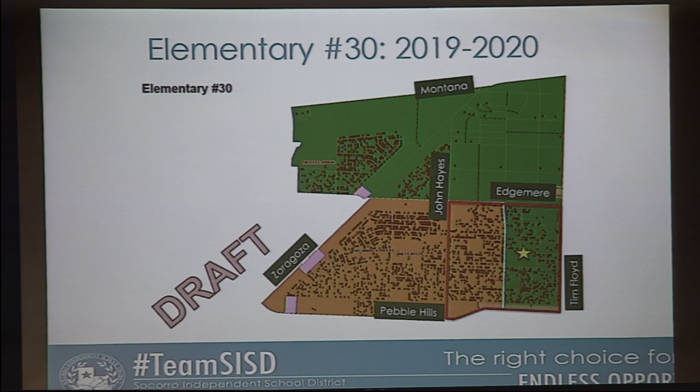The first recommended boundary change will be for elementary number 30. The recommendation is to provide support for Butler Elementary. Butler Elementary right now has about 350 overflow students.

What we are recommending is the area in orange currently is the Butler feeder pattern's attendance zone. The area in green is the current Chester Jordan attendance zone. Elementary number 30 will actually help both of those campuses, and it will incorporate everything east of John Hayes, north of Pebble Hills, west of Tim Floyd, and south of Edgemere.

Pre-K number 30, thank you to our architects, does have a pre-K hub with 10 classrooms designated for pre-K. It is a 898 projected start. Out of that projected start, we have 192 pre-K students projected to open up elementary number 30.

We are going to do a soft open for the pre-K hub at number 30, serving Butler Elementary and elementary number 30, just like we did with Carrasco this year. Carrasco Elementary is the pre-K hub for Lujan Chavez and Carrasco. We would like to do the same thing for the first year of elementary number 30 opening.

These are the numbers off to the right as far as the number of students that we would be transferring, and they would be the first students to open up elementary number 30 with our new principal, Ms. Thomas. With your approval, we will start going out to community meetings.

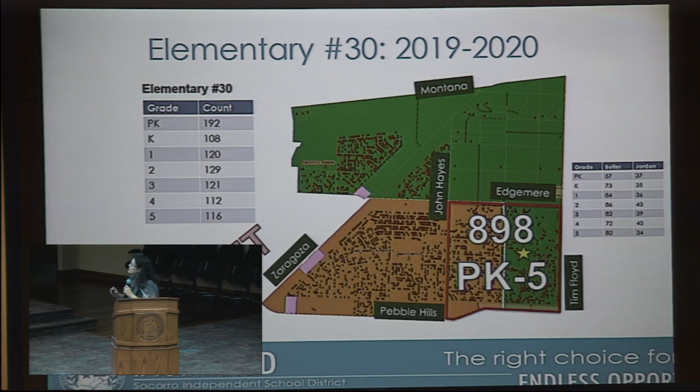We'll first have faculty and staff meetings with both Butler and Chester Jordan to share the proposal. Then we'll have a number of community meetings with parents to get feedback. After receiving feedback, I will recommend another board workshop to present the feedback we've received, and the possibility of presenting the recommendation for approval at the November board meeting. So this is for elementary number 30 proposed boundaries.

As you noticed for Butler, this is their current attendance boundary. What we are doing is removing that little peninsula to the east. Let me get the actual enrollment as of yesterday. Currently Butler is at 1,009 students.

With this boundary recommendation, we would now have 895 kinder through 5th grade students. Within time, any of the portables that we have would now transition to any other area of need, and we would bring the students into the campus. Those are our new counts if this boundary is approved in November, and that is what our grade levels would look like.

Any questions for boundary recommendations for elementary 30?

Yes, sir. Ms. Macias, I'd just be interested in seeing the same information for Chester Jordan as you gave us for Butler—the anticipated counts for number 30, the numbers transferring from each of the schools, and the result of students anticipated to be enrolled. But we don't have it for Chester Jordan. I'm moving forward for Chester Jordan now. Let's see. Yes.

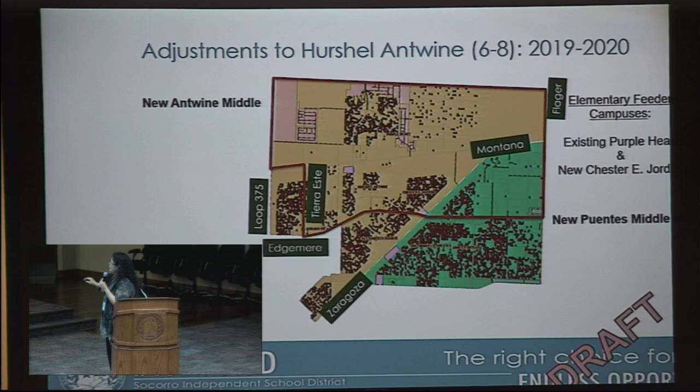What that would do is now we would have 2 elementary campuses, Chester Jordan and Purple Heart, that would feed into Hurshel Antwine. And right below Edgemere, we would actually have 2 elementary campuses feeding into Rafael Hernandez.

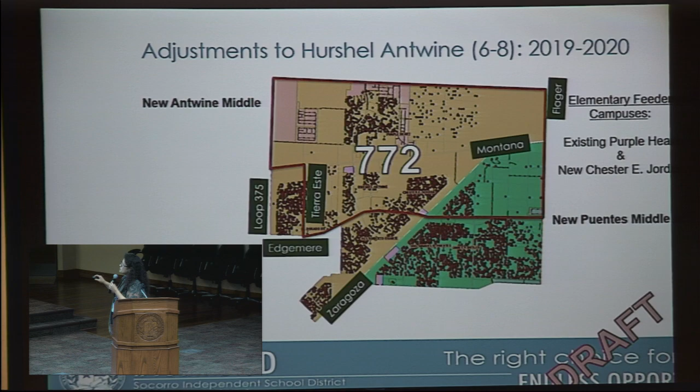With this proposal, we would have Hurshel Antwine at 772, 6th through 8th grade students. And the transition would be our students currently at Hernandez. Everything in yellow is the current Rafael Hernandez boundary.

And currently in Puentes, this is the area in light green or light blue. This area here already goes to Chester Jordan for elementary. So our recommendation is that they continue with their cohort right over to Hurshel Antwine for middle school, instead of splitting the cohort with some going to Puentes and some going to Hurshel Antwine. And for high school, they would continue with their cohort to El Dorado High School, and that now solidifies the boundaries for El Dorado High School.

What that would do is now we have available space for our students. Again, all this area here is the undeveloped area where we have single-family homes coming in the future. So that would give us available space to house them in a middle school.

For Puentes, this is one of our fastest growing middle schools. It also allows us available space for the growth that is projected in the Pebble Hills feeder pattern. So therefore, our new Puentes, 6th, 7th, and 8th, now we have available space. Currently, Puentes is at 1,100 students. It's a little bit over.

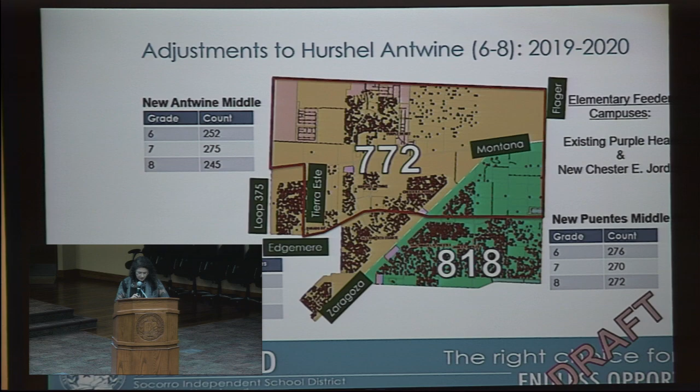The recommendation of Hurshel Antwine. Ms. Macias, let me make sure I'm following. You're suggesting that we change Hurshel Antwine from an elementary school to a middle school? Correct. Okay, all right, I got you.

Along with that recommendation is the second piece, which is Paso del Norte is currently a K-8. Our recommendation for Paso del Norte would be for it to be an elementary campus. That way, everything below Edgemere, we have two elementary campuses, Paso del Norte and Duarte, that will feed into Hernandez. And everything above Edgemere, we have two elementary campuses, Purple Heart and Chester Jordan, that will feed into Hurshel Antwine.

What about the appropriateness of the facility itself? I've been into some elementary schools like Horizon Heights, and I can't imagine that ever being a middle school. Not that we would, but Hurshel Antwine - it was built as a K-8.

Oh, it was? Ms. Macias and I have walked both facilities. There are some issues with the lower levels because both of them are K-8s. At Antwine, the kindergartners and pre-K have smaller restrooms inside the room and stuff, but that can be addressed. It was built as a pre-K-8, so there are athletic facilities and stuff for the 6th, 7th, and 8th graders.

Ms. Nájera, Mr. Eby, can we get a better map in a packet? I can't make heads or tails out of this. What's going to happen here is, one of my concerns is we're going to bounce students back and forth, and we know that's detrimental. What I'm hearing is a lot of numbers about where we're moving, and I don't mean to be rude, but we're not in the process of packing tacos. We're really talking about students here and where are we going to put them. Can I get better - I can't make heads or tails of this.

I mean, they're colorful, it's the geocoding maps, but I can't make heads or tails. I apologize, but I can't see anything. Could we get a handout later, maybe in the Friday packet or something? Yes, sir. And then also a comparison of where we're moving students, because we just did boundary movements, and if we're going to move a student over and now we're going to move them back, I'm not supportive of that at all.

This has been part of the plan. None of these students have been touched before. This is part of the phase-in to maximize the use of our facilities. This is the first time we touched this El Dorado feeder pattern, and we did that with the best intent to ensure we're maximizing the use of our facilities versus building a new building and now having available space. As we built number 30 and 29, it gives us capacity. For example, Duarte would help support Lujan Chavez with the overflow, and Chester Jordan would help Butler. With our new elementaries in those feeder patterns, it now solidifies the El Dorado feeder pattern and the buildings we have available to meet the needs of all our students.

One more question, Mr. Nahid. Mr. Arrington, so with Hurshel Antwine, since it was built for K through 8, are we going to have the athletic facilities as well? Yeah, it's got a full gym, locker rooms, a weight room, softball, baseball, track. And we built them at Paso del Norte, and we don't need them now - it took us so long too, took a long time to get those there. Okay.

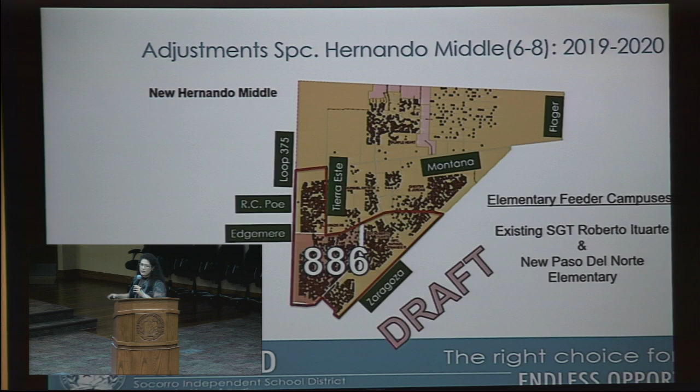In this area, we are already consistently—if you notice, there is no little pink area, so this is the true boundary for a middle school. So it would be at 886 students, 6th through 8th grade.

And for Roberto Ituarte, again, maximizing the use of all of our facilities. For Ituarte, it currently has available space, so Ituarte would now be, and it is centralized, our pre-K hub for the El Dorado feeder pattern. And with that, it would be comparable to O'Shea and Myrtle Cooper.

With that, we would have our 348, give or take, pre-K students in our hub, and Ituarte would be at 917 students. That is the normal capacity that Ituarte has had. This year, with the opening of Rafael Carrasco, Ituarte's current enrollment is 731. However, their enrollment was very close to 1,000 before, so this is what they are used to as far as for our students. So this would give them a pre-K hub and then the comparable numbers for each of the grade levels.

Ms. Macias? Yes. I'm sorry, are we currently using portables at Ituarte? At Ituarte, they are currently not using the portables. What we have them using the portables is over at Rafael Hernandez for our middle school.

Thank you. Did you have a question, Mr. Eve? Yeah. So our schools are up here. Can we do this with somebody else so that it's not such an oval pattern as usual? I mean, I don't like that every time we got the schools at one end of the feeder pattern, and we found numbers to fill a school, so we go down here. Down here, there's nothing else we can do and adjust so that the school is more centered within the feeder pattern, so it is a neighborhood school?

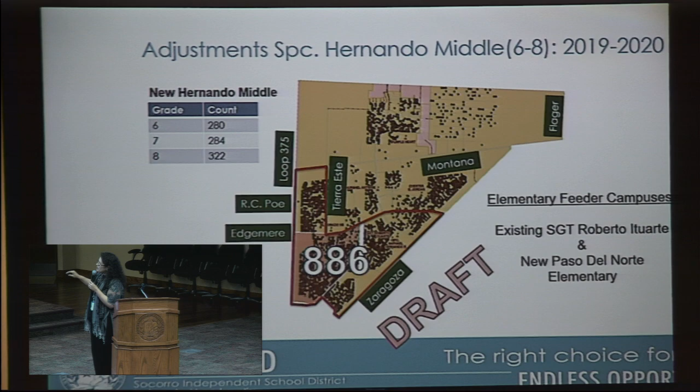For Hurshel Antwine, for the first year, 2019-2020, we would be transitioning to the middle school. So kinder through 3rd would transition right next door to Chester Jordan. The area right over here, and I'll go back, that's the little peninsula here. Kinder through 3rd would transition to PDN.

With that transition, Hurshel Antwine for the year 2019-2020 would be 4th, 5th, and 6th grade. Those 5th graders would be transitioning to that middle school 6th grade section. For 2019-2020, the little ones at Purple Heart and Chester Jordan 5th grade that used to transition to Rafael Hernandez would transition right next door to Hurshel Antwine. So that way, now our 6th grade is becoming set for our new middle school as it transitions over. So for 2019-2020, we would have 360 students at Hurshel Antwine.

What that would do is give available time to maintenance and operations so they could do any adjustments needed for that campus as it transitions to middle school. As we go through the years, it's a 2-year transition for PDN, a 3-year transition for Hurshel Antwine, so that all of the facilities are in place as the students transition in.

For Chester Jordan, it stays the same, it's a K5, but they are now adding students: 3rd grade the first year, 4th grade the next year, and 5th grade the following year. That way they're transitioning over for Chester Jordan. These are the students as far as Antwine, kinder through 3rd, kinder through 4th, kinder through 5th, and these are the numbers as they transition in the 3 years as we go through.

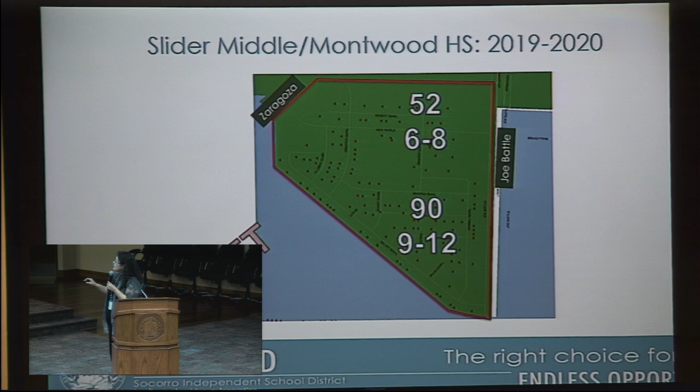One of the last proposals is this area here, we call it the Quails area. I think it was addressed about 10 years ago. This Quails area, currently, our students go to Slider and Montwood High School. There's 52 6th through 8th grade students, and there's 90 9th through 12th grade students. These students technically fall right into the America's feeder pattern. But a decision was made, they supported Montwood for the past 10 years. Before they were at America's and they were transitioned to Montwood 10 years ago.

Our recommendation - which ones again? This little area right here, it's called the Quails, we call it the Quails area. Right behind the Walmart. It's not on... oh, it's not on the - where again? Yeah, because I click on it - bottom, down there, at the bottom, this little dangly part, this little area, it's the area here.

Right behind Walmart. So the recommendation would be that they would transition to the America's feeder pattern, again, when it's a natural transition: 5th to 6th, pre-K to kinder, or 8th to 9th grade.

So half of Slider would go to Montwood, half of Slider would go to Americas? No, it's a small portion. There's currently 90 9th through 12th grade students, so these are our numbers here. At Slider, we currently have about 52 students. So where would they go to middle school? They would go to Clark, and then they would go to Americas.

The problem with Montwood is it's landlocked, on the west side of our district. And anything we pull away from that will end up at capacity tomorrow. So why would we want to do that?

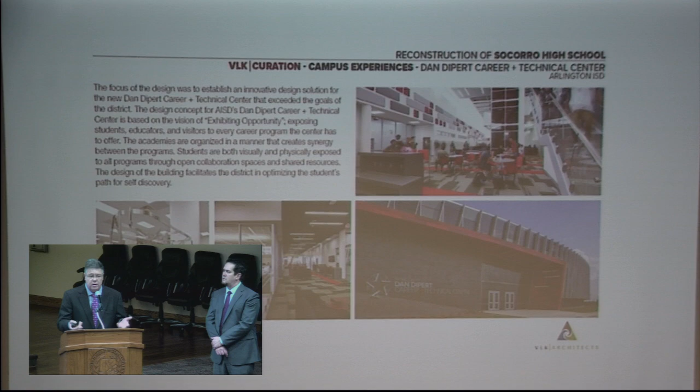We then went to the Dan Dipert Career and Technical Center at Arlington ISD. It's a campus-wide facility, designed to exhibit opportunity. You go through a Main Street area with glass that looks into all the different academies, which are positioned so their academic programs can feed off one another and do projects together. That was one of the things we brought back and incorporated into the new Socorro High School design.

This is Energy Institute High School, which opened this year at Houston ISD - a high school for students focusing on energy careers. The main thing we saw here was how collaboration spaces working off the labs and classrooms, with whiteboards, marker surfaces, and projection, allowed students to work not only in the classroom but also out in collaboration areas.

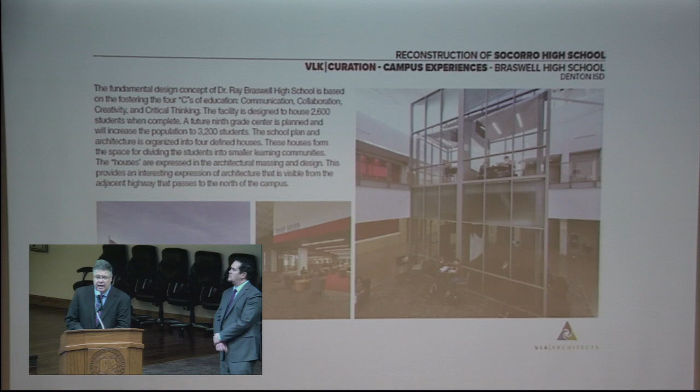The Braswell High School is the newest high school at Denton ISD. Again, what was seen here was lots of collaboration areas where students can work with themselves and with faculty members in small and large group instruction, to really work in settings more like what they'll experience in college and in the working environment.

And then Keller High School. This is Keller ISD, northeast of Fort Worth. And the reason for touring this campus, this is a very old campus.

Like Socorro High School, it was the first campus at Keller ISD. It had gone through many renovations and additions in the past, such that you couldn't even find the front of the building. There were areas back in the building that they were still using for various functions, but they no longer supported those functions with the size of the programs, like the band hall. So they wanted to go there, see how this building had been renovated successfully into a new campus that represents the Keller attendance zone.

And then Alvin High School, Shadow Creek High School, Alvin ISD, down south of the Houston area. This is a new building that mainly is set up for flexibility and transparency - the ability to move students around, to move walls, to different program types, a very adaptable surface for academics as it proceeds through the years. Plus it's a very compact plan and it has 3-story academic towers.

So what came out of this was honoring the tradition of Socorro High School - such things as juice bars, being able to plug in devices, learning centers for tutorial areas, and really a maker campus. Not a maker space, but a maker campus where you can do education everywhere through the district.

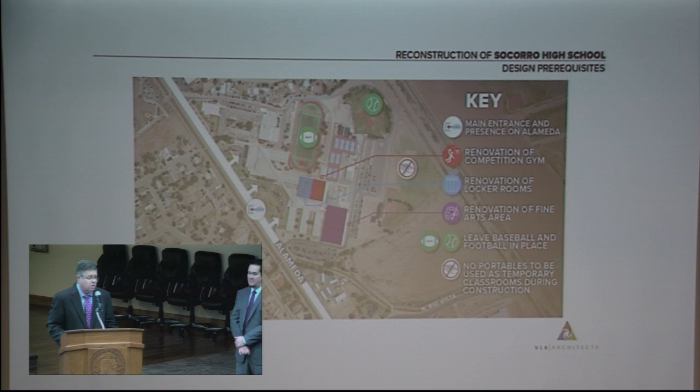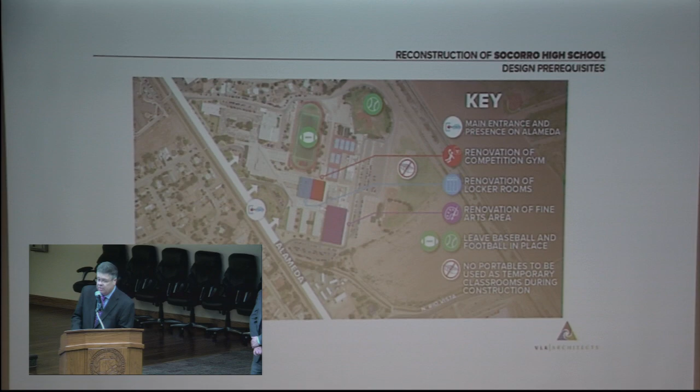And then one of the things that came out of the charrette is how the neighborhood and the community wanted to make sure that the front of the building was oriented and visible off of Alameda Road.

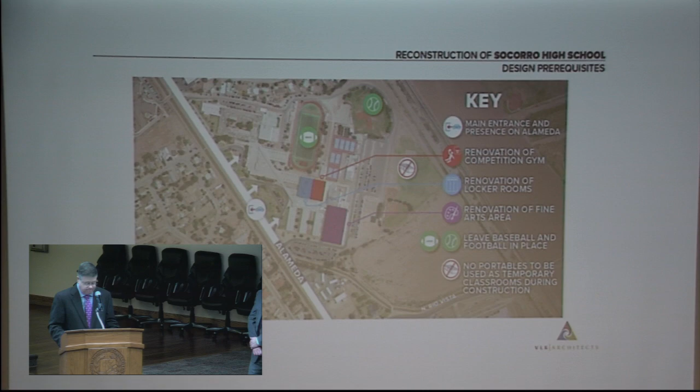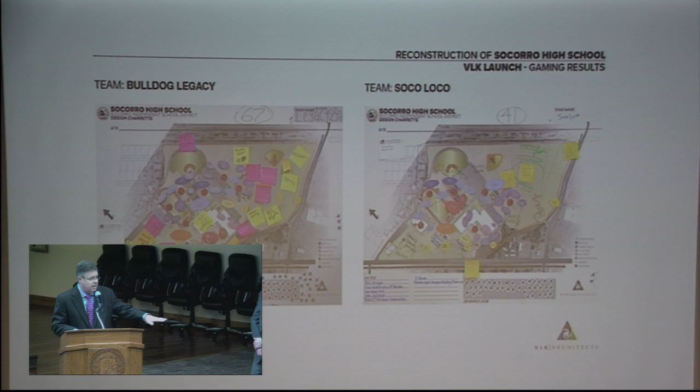This is examples of some of the gaming concept boards that the teams worked on, moving the puzzle pieces around and getting the things acclimated. We let them move things around to see where they wanted academics, where they wanted the administration area, those type of elements, where they wanted athletics. We then came back with this concept here, which they selected, that was turned into the design by that committee.

And so the entrance is here off of Alameda, along this face of the building. There is CTE programs here, fine arts here, athletics, cafeteria with the library here, career and technology, and then academics here.

Because one of the things that was talked about is really embedding CTE and the core academics, and Socorro Early College and the Health Professions Academy together, to really let those programs share, do projects together, and support one another.

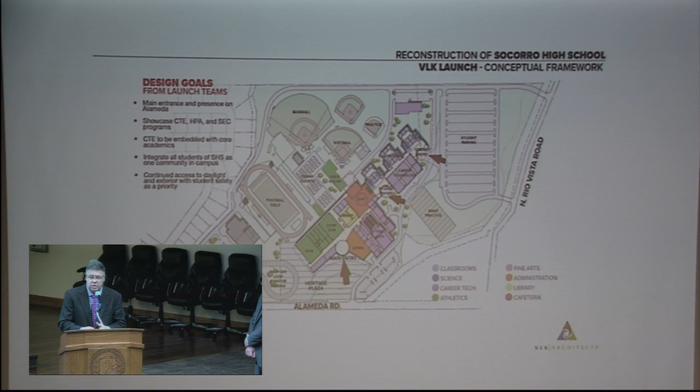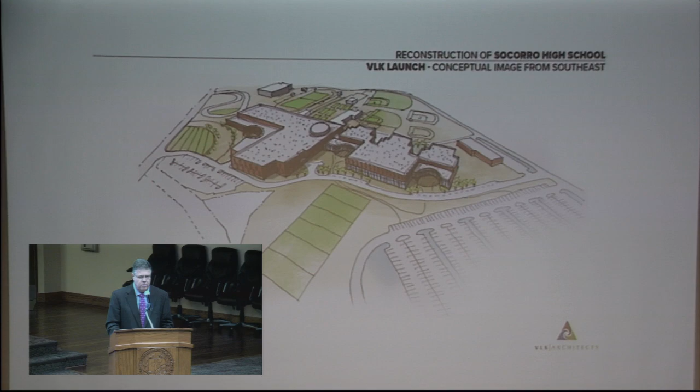And also what came out of this was really a discussion by the parents, the teachers, and the students - how they wanted this building to really show them and lead them to what their future possibilities are of working and living in the Socorro community and beyond, and to give them aspirations and to show them all the possibilities through education and how they can benefit from that.

We had typology of space boards. These are boards where we have the exterior of the building, classrooms, library, cafeterias, athletics, and they put stickers on here, and they also put Post-it notes and put comments, and these are the highest ranked ones that we've received from the VLK Launch.

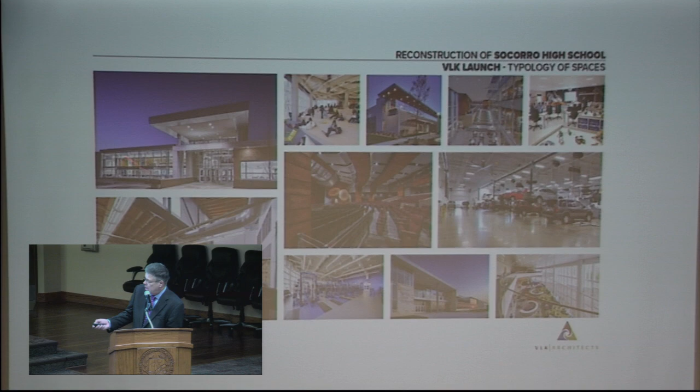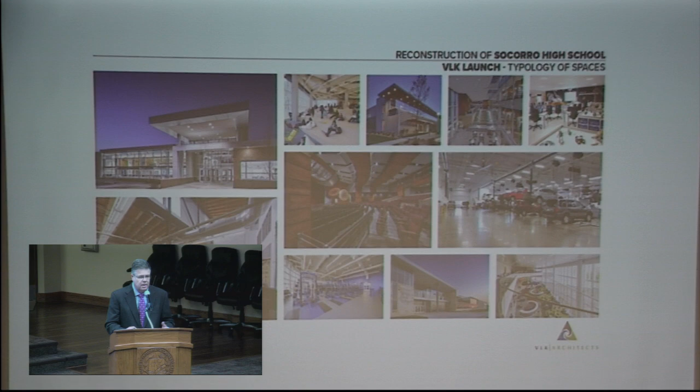And so what they were looking at is they told us they didn't want a building that looked like Socorro buildings. They wanted a building that was more modern, very contemporary, clean lines, lots of natural light, lots of windows into two-story spaces. This is very much a space here in the automotive that emulates industry - that's a school automotive space, but it looks like a car dealership automotive space, and that's what they wanted. Not something typically that you have around the district, but something very forward-thinking that, again, leads to aspirations and dreams.

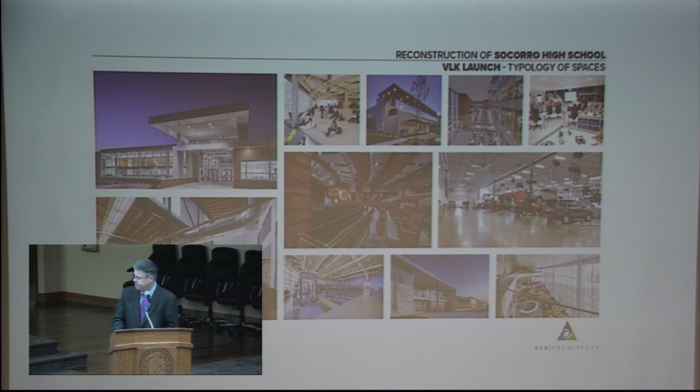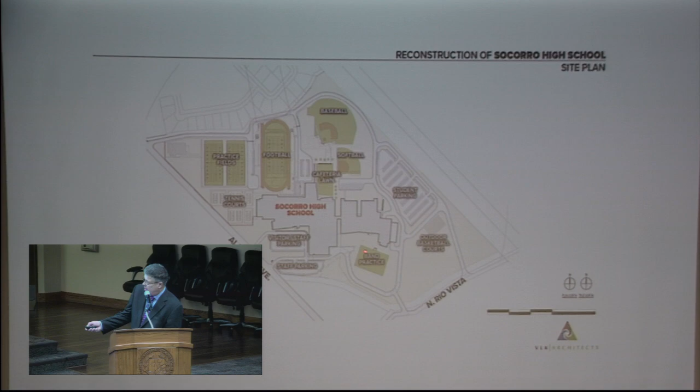Band practice will be here adjacent to fine arts, and then student parking here. And North Rio Vista is here. Traffic coming in, bus service and access will be along this area here, coming into the cafeteria here, and then looping around the buses through here.

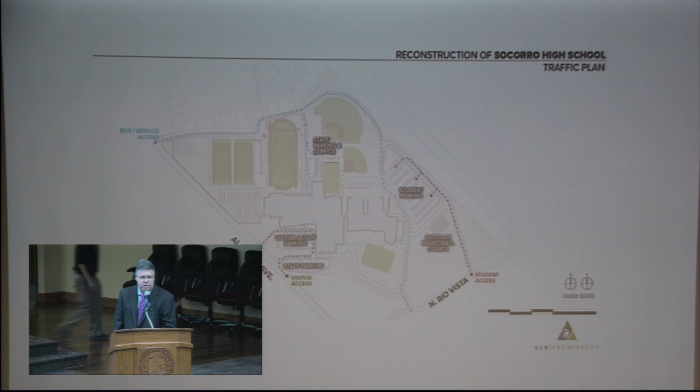On this side for the buses will be a 3-lane road, so that way the buses don't block up that road, which the fire department and emergency personnel appreciate, so they can still get to the building in case of an emergency. And then student parking will come over off of North Rio Vista.

One of the other things that we've incorporated is this drive and drive loop here, which is an athletic drive, so buses will come in here, pick up students from the athletic locker room area and take them to and from games.

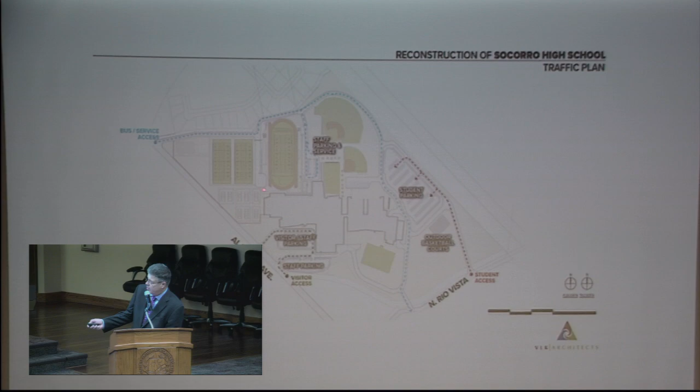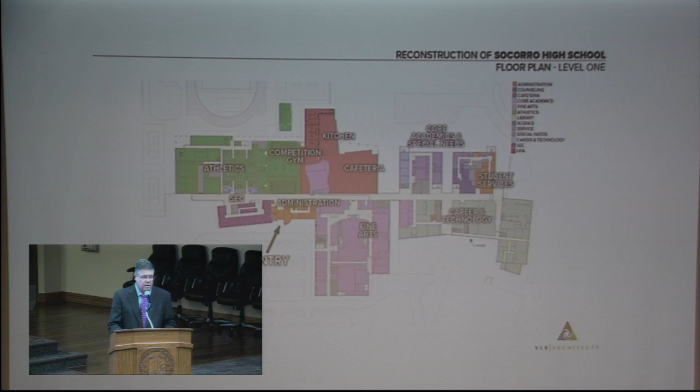In addition, this area has been oversized, and on election day that will be a polling location, with polling booths out there so people aren't going into the library. By doing this, we've created a place for the public to get into those spaces, but they don't cross secure lines into the student area or the high school area.

Back in the cafeteria and kitchen, the cafeteria and kitchen serving line opens up to the lawn, and this is the black box theater.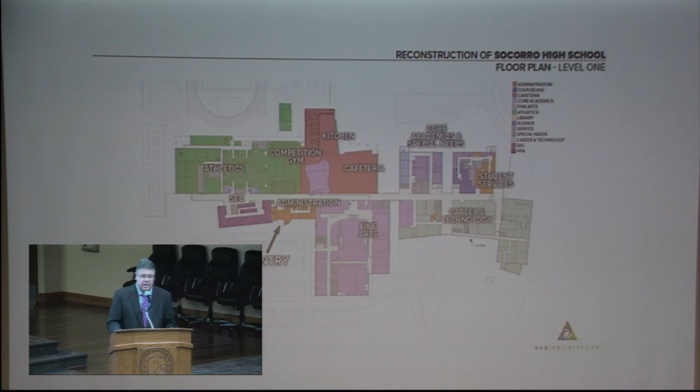One of the things we've done, due to the fact this is a phased renovation, is account for areas that will take quite a long time to do—like the auditorium. That's going to take significant time, especially when we take the roof off the building, take out the foundation system of the existing stage, and raise it to the appropriate height. You don't just do that in an 8-week time period.

By creating the cafeteria here and the black box theater, there will be one wall that's a vertical lift door, which acoustically seals that space off from the cafeteria. So while the auditorium is being renovated, this can be the stage used for plays, musicals, and lectures, with the cafeteria serving as seating.

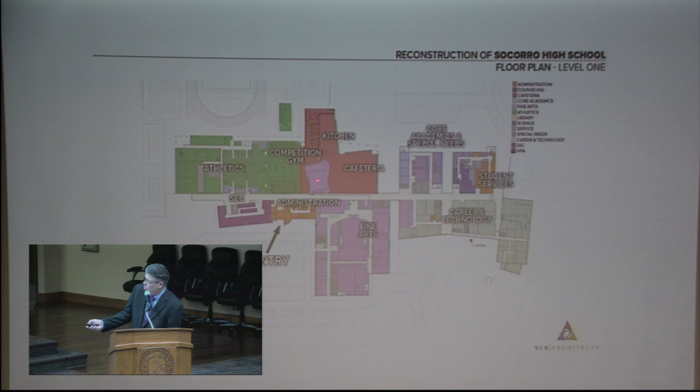So they'll still have an auditorium space in the building while the main auditorium is being renovated, and when it's done, you can still use the black box here. They'll have their own scene shop, two dressing rooms, storage, and restroom facilities. So they can do their black box performance, or it can be used as another space for instruction, district-wide meetings, or whatever you'd like. It gives you another flex space in the building.

Second floor, so you're above the administration area. You've got the Health Professions Academy here, with all their labs in this space back here. This is the second floor above where the locker rooms are now, which will be totally renovated. Socorro Early College is on this second floor area here.

There's a bridge that connects, and you'll be able to look down to the cafeteria and out through windows to the lawn. The biomedical classrooms that are part of CTE are here, so they're in close proximity to the Health Professions Academy.

Navy Junior ROTC is in this area, and this is the other half of Fine Arts—band and the flag room—with more storage for Fine Arts in this area. As you come down this way, you've got the library, business classes from Career and Technology, and general academic classrooms, collaboration spaces, special needs rooms on each floor, and the science labs here.

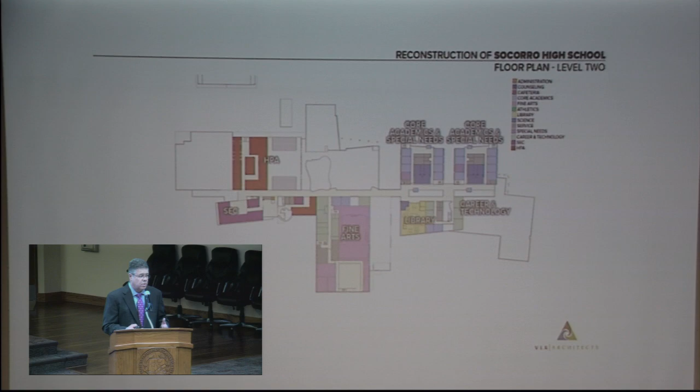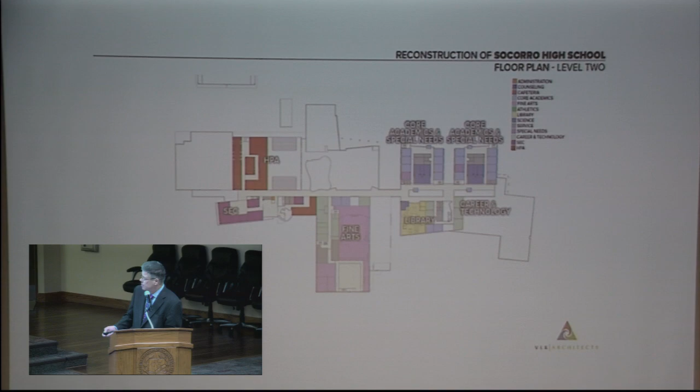One of the other things we've put into the building are design labs—spaces for teaching professionals to work together on curriculum, training, or whatever they need, small groups getting together to do their work. The third floor comes up here, and this is more of the same, just like the second floor layout, with science classrooms in collaboration with the design labs there.

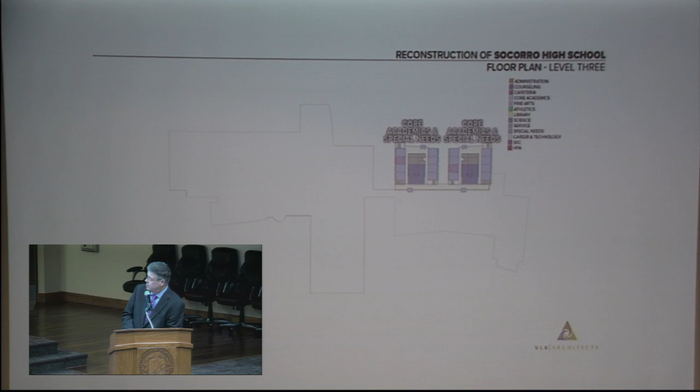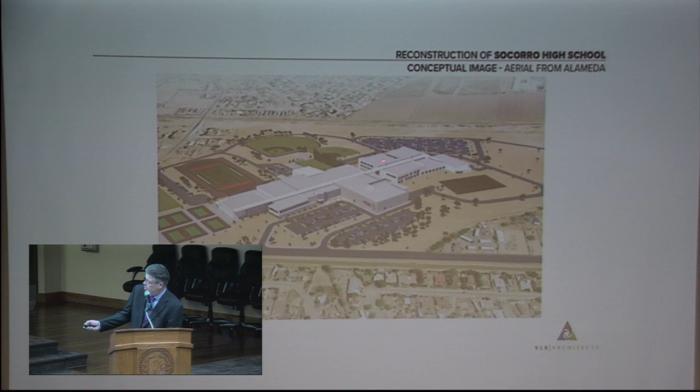This is the lawn. That's the cafeteria, all glass back in there. Glass at the serving line. Students can come out there.

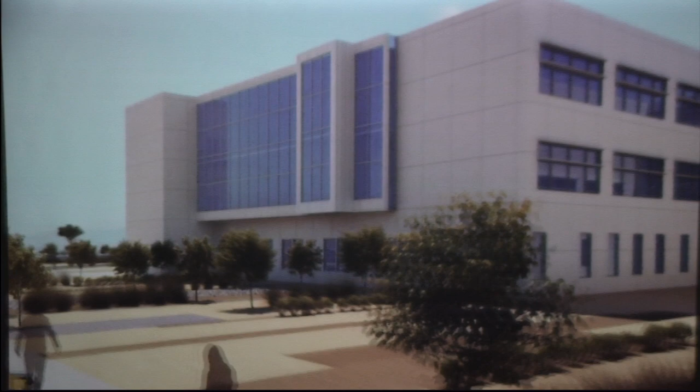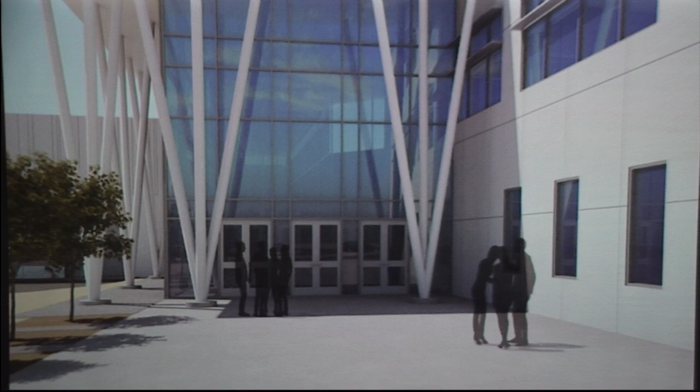On the academic towers, they face north. This is the collaboration spaces, and there's glass that lets natural light into those collaboration spaces, but we also have shading devices over those windows for energy savings. This is the student entry. That's also the entry for the CTE program.

Weight room. We're going to reuse the existing training building, fine arts, and the 2 academic towers.

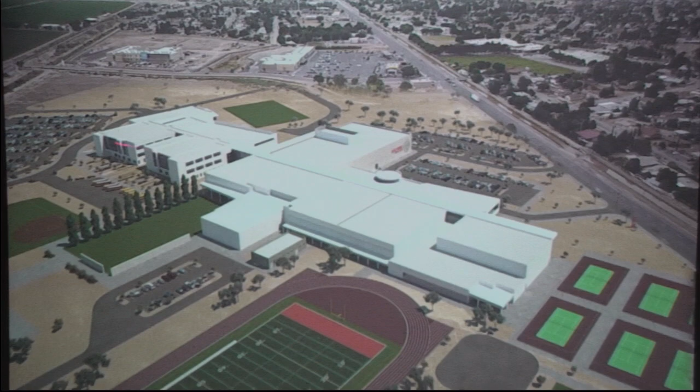And now Clinton's going to go over the phasing and schedule.

All right, so all of this kind of work doesn't happen at a quick pace. We know that there's an existing campus full of high school students that have to go about their daily life, so we want to be respectful of that, make sure we're working out of their way and giving them great facilities at the end of the day. We'll have a quick video to show the phasing. We're still working with the contractor about the overall time frame, but the concept will be here.

To make a little bit of room, go forward with some site work that can happen very quickly over a short summer period, on the side while high school is happening. This is what that would look like at the end of that construction phase.

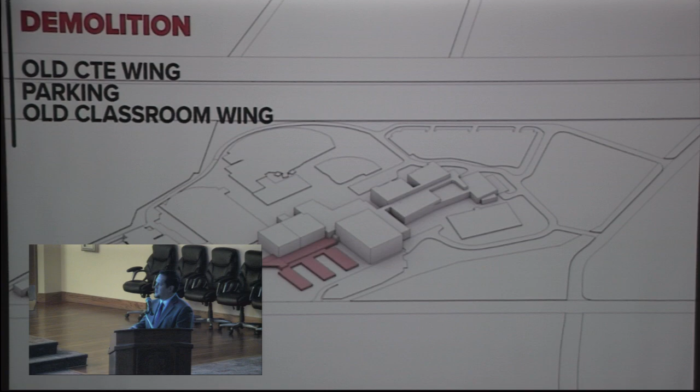Now that we can move students over to that new construction, we can come back into parts of the existing building and start demolishing and then rebuilding new facilities. So there, now you would have your front entry to Socorro High completed. And then the last phase is to demolish the last pieces of the old building.

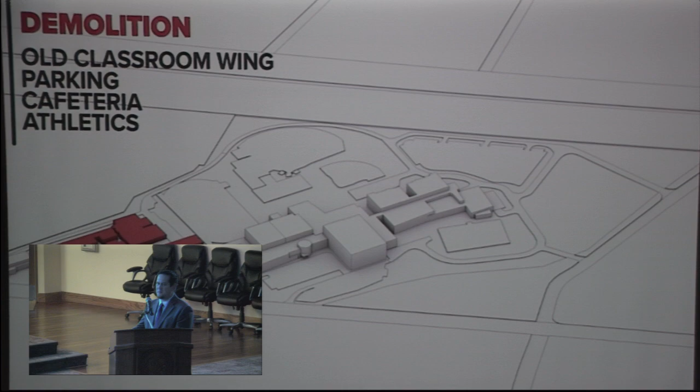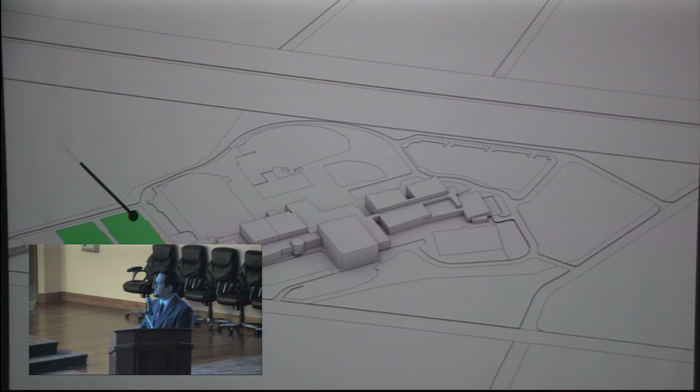Build back some of the site amenities, the extra practice fields, the tennis courts. And also at that point, the new facilities come online, so we have the opportunity to renovate some of the other spaces.

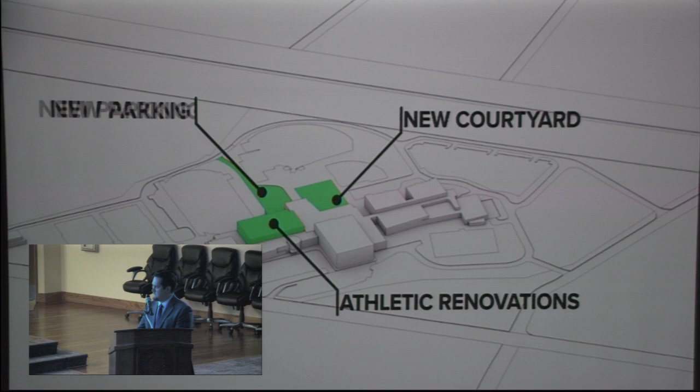So right now we've mentioned schematic design, so that's about 20% through the design process. We're here to get feedback, but also want you to understand that everyone we've met with so far will be going through additional meetings as we go into design development. The big picture of schematic design is to listen and hear what the community, the district, the staff, students want from their high school.

The next phase is, now that we have all those pieces, to meet with the individual teachers, coaches, band director about what goes in those spaces. So that's that next step we call design development. After that, it's technical drawings, so the contractor has something to build from, and then construction.

So the rest of this month, next month, we'll be going through those design development meetings, that early site package, so we can start some of the demolition and moving the softball field, making sure any major utilities are moved prior to students showing up so that all those disruptions occur while the school's already closed. High school's never truly closed, but there are times where there's a few less students on site.

We'll take any questions? Questions? Comments? I do, but if somebody else wants to go first, I don't care.

You go ahead. Okay, so what is the current square footage of Socorro High School, and what is the square footage of this one? Square footage of the new design is 506,000 square feet. And the existing is 502 or something like that.

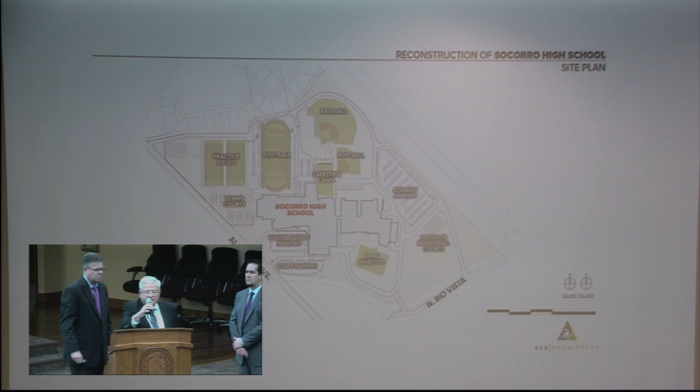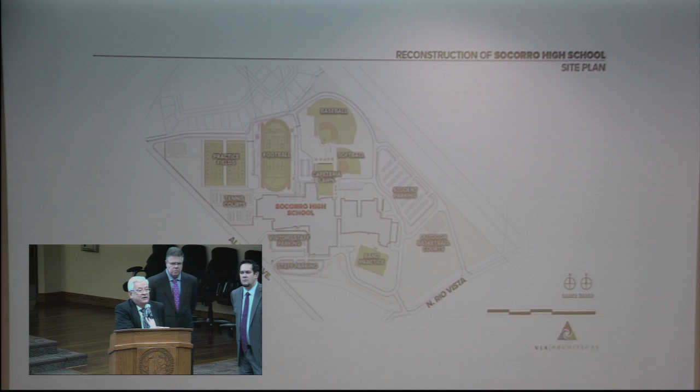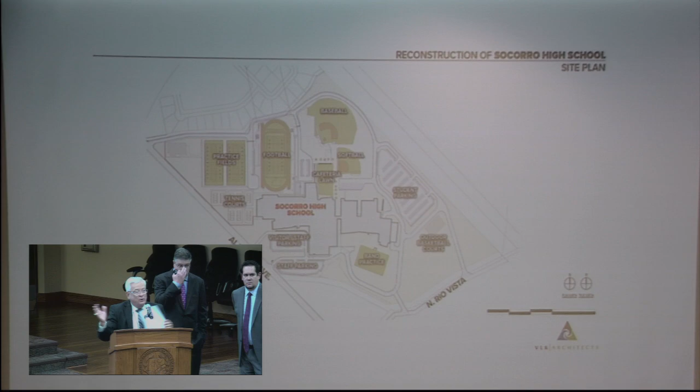Okay, give me... On that, this is going to be designed with sprinkled building and stuff, so I think you were probably thinking more of the multi-purpose room. All of those that we're building, yeah, because we have to separate that, since some of the existing elementary schools are not sprinkled. If we attach them, we have to upgrade all of that. This will be built under the current code, whatever that is. It can change in 4 years, but we should be able to attach to it because the addition will be sprinkled.

For a longer period of time. Yes. Okay, in your architectural design and planning, explain to me what you mean by blended learning. Because people use the term blended learning in a variety of categories. You were telling me that the placement of CAPE, HPA, and early college high school was to provide for blended learning. What does that mean to you as you're designing this building?

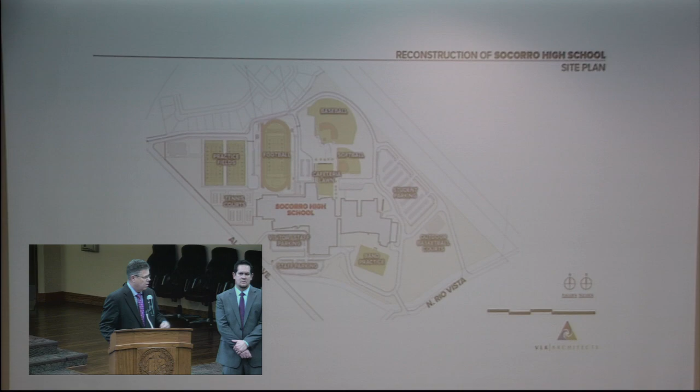Well, I'm calling Ms. Farmer over here to help with that, because as we were going through the design, we were looking at the art classrooms with architecture, engineering, and such, to blend those together to have program opportunities. I'm going to call on some of the academic folks because they've been in those meetings to help explain it from your district's perspective.

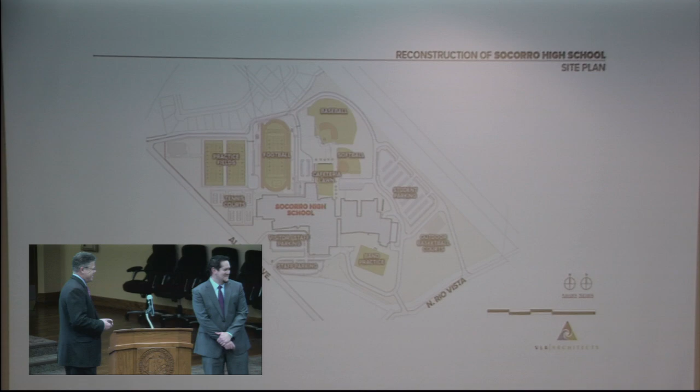I believe it. So what are we talking about here, blended learning? Because as you all know, we've talked about this before, it means different things to different people. What are we talking about here?

So one aspect of blended learning is when you have your assignments, and it can almost be like flipped learning, right? The assignment is given, the student goes home, does his notes, does everything, and then comes back to school and starts at that place the very next day. That's one aspect of it, the flipped classroom.

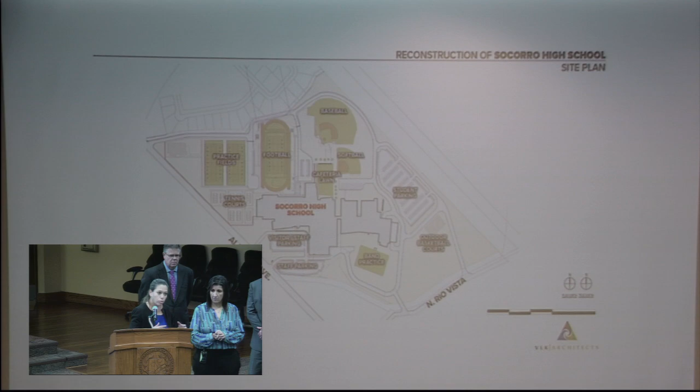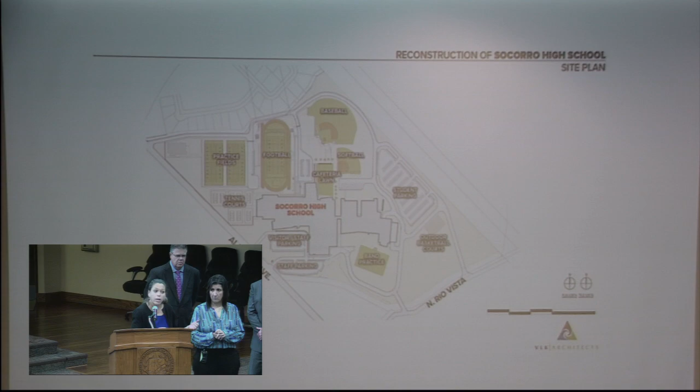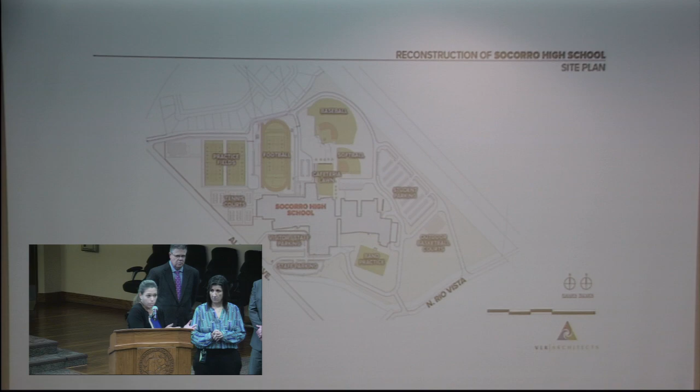The other aspect of blended learning is when you're working on particular assignments. I'll take mathematics, for example. You can work on mathematics projects that may integrate sciences, depending on maybe chemistry. You're doing chemistry equations, but it may also fit into some of your mathematics. Depending on the programs we have with technology and math programs, part of it is using technology, part of it is hands-on, and then of course you have your work that you're scripting and solving. So blended learning has a few different aspects.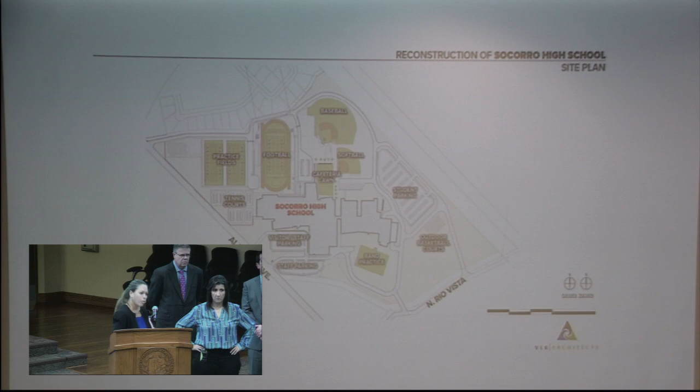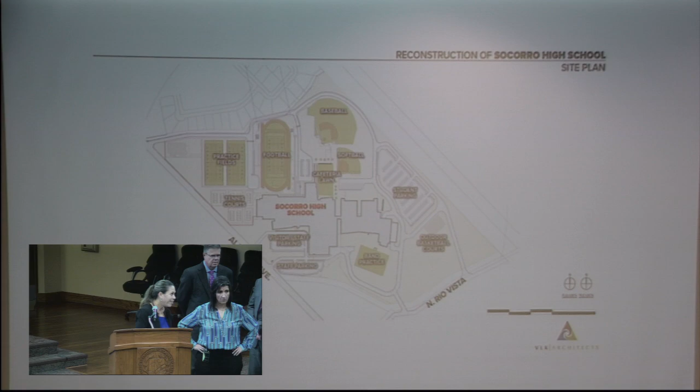I'm with you, okay? How does it apply here? This is with the CTE? How does it apply with Socorro High School? Because what I heard from the architects was that CTE, HPA, and early college high school were placed in close proximity in order to accommodate blended learning. How does it fit here? Unless maybe that's not what they meant, and that's potentially true too.

It would go with your high school if you're doing Mr. Ayub's courses. Yes, go ahead. CTE, HPA, and the early college and HPA are in close proximity, but CTE is way on the other side of the other building. Right. Yes, and they mentioned that this would be blended learning. So how does that apply?

So your HPA and your early college, they may share some classes together. For example, your dual credit classes, your science classes, your biology classes, whatever classes you may have, they may share some of those classes together.

With that, your curriculum is also being shared, right? If you build a curriculum, the classes aren't there. The biology class is down the hall, so that's not going to work that way, though some labs may. So can you build curriculum where you incorporate this? I'd give you that, but I'm not really sure that's what we were talking about here. Unless you could help me understand, because I'm not getting it.

For the HPA and the SEC, the early college, we're looking at certain areas such as lecture halls that we can share so that we can maximize space. One of the things we talked about and asked is having the ability to bring in cohorts of kids, whether it was a freshman group in the HPA program or the SEC group. What we're finding is some of our kids are in both HPA and SEC programs, and for that reason, bringing them together and sharing space will maximize the use of that area.

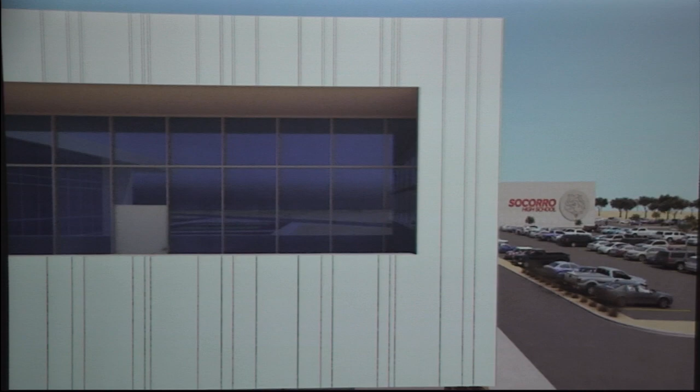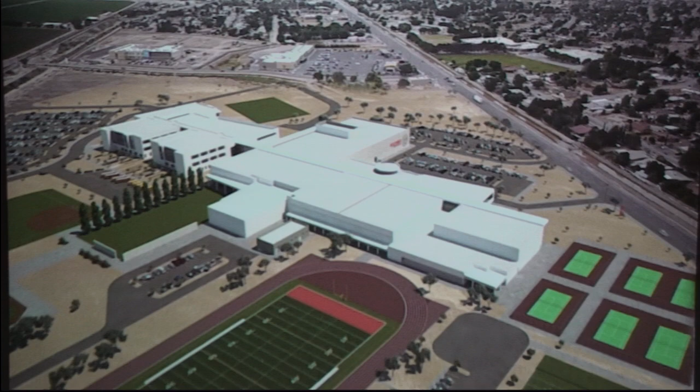So I was hoping we could be more in Alameda compared to the old design. I mean, if this is gonna be the best we can do, you could make me a little happier by turning that front door so people can see it from the street rather than it being on the side, but beyond that, that's fine, I guess.

The last thing I have, well, now's our time to make these points. And I'm glad Mr. Tovar's here. I know I spoke at length with Ms. Correa about this.

I'm not crazy about the two administrative areas. Why would you split your management staff? Now you're at one end and you gotta either call them on the phone or the radio or walk all the way over there. I can understand if you wanted to put a conference room, an office over there so that temporarily there's somebody like they do at the other health profession academies, a principal there. But you've just split half of your administration and put your counselors as far away from you as you can. Why is that functional? Because I looked, there are no other high schools that do this.

Good evening. Good evening. How are you? Nice seeing you again. Likewise. In the big picture, Mr. Ayub, and everybody else, just so you know, I talk to the kids every morning.

I have sacred 5 minutes to preach to my kids, and I want you to know that I'm living in a brave new world these last couple of years, where I leave aside the academics because we have little beautiful communities within this building of learning. SEC, HPA combined together, CTE, all those beautiful things. Ultimately, my job is to make sure those kids are safe 24/7 as long as they're there.